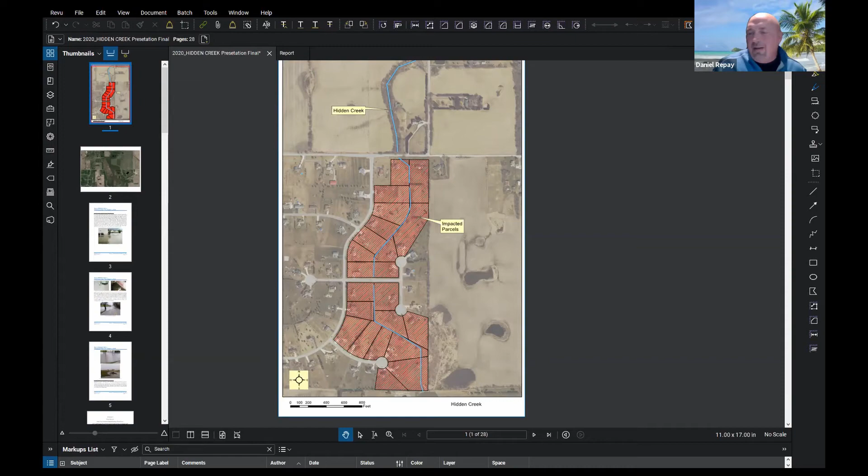All right, next up on the agenda appears to be the city of Crown Point. Will you introduce that? Sure. I don't know if Al or Andrew is going to lead the presentation for this interceptor. I think it's just for the CSO. They had sent us some information this morning for a part of the presentation. I sent it on to you guys. I believe that's what they're going to use here today to show you the amount of CSO going into Main Beaver Dam Ditch. That's about the best I could lead into this presentation.

All right, thanks, Dan. My name's Al Stong. I'm with Commonwealth Engineers, and we do most of the utility work for the city of Crown Point. My partner, Andrew Robarge and Teresa Hartwig are on the line as well. And Terry Sikora and Jason Scott with the utilities are here. I have a short presentation. It's 14 slides that I'd like to share with you now, if that's okay. Absolutely. Okay. Can you see the cover presentation? I can. Yes. Great.

The first slide is a video clip that was shared with me from one of the homeowners' complaints last year in May of 2020. So I'll play this. It gets brighter as it goes on. But this clip is identifying a significant flooding issue. You know, sir, we've seen a lot of these videos and they're all very disturbing. Is that a pool? That's a pool. It is. Okay. All right, we get the idea.

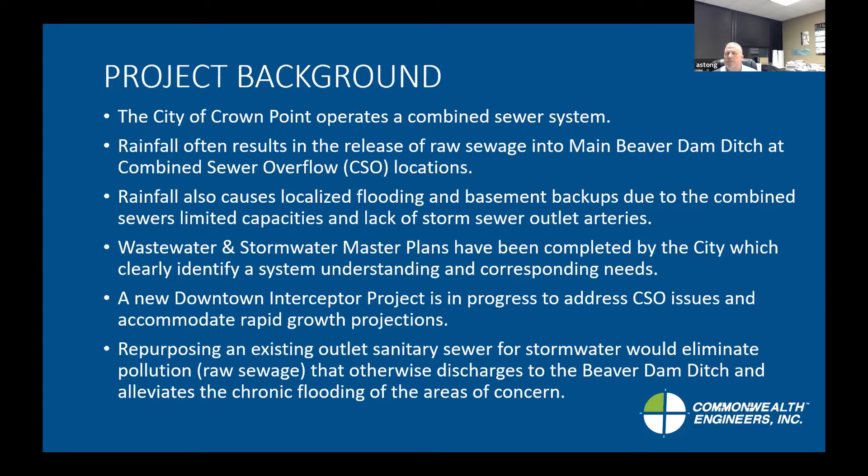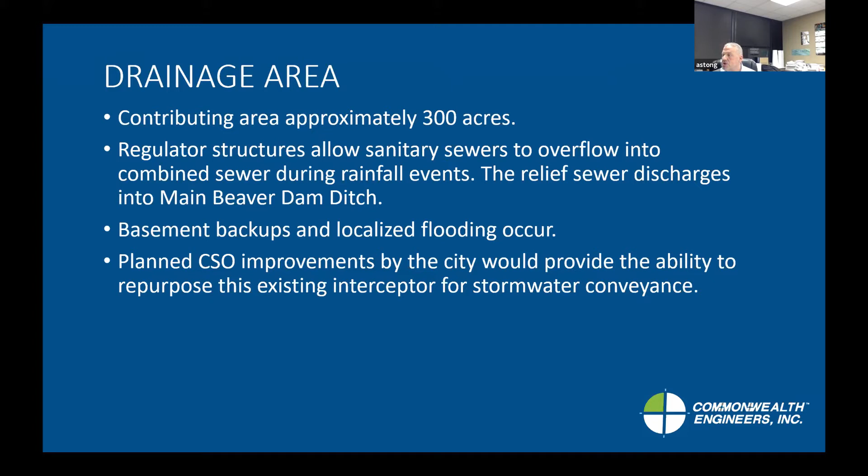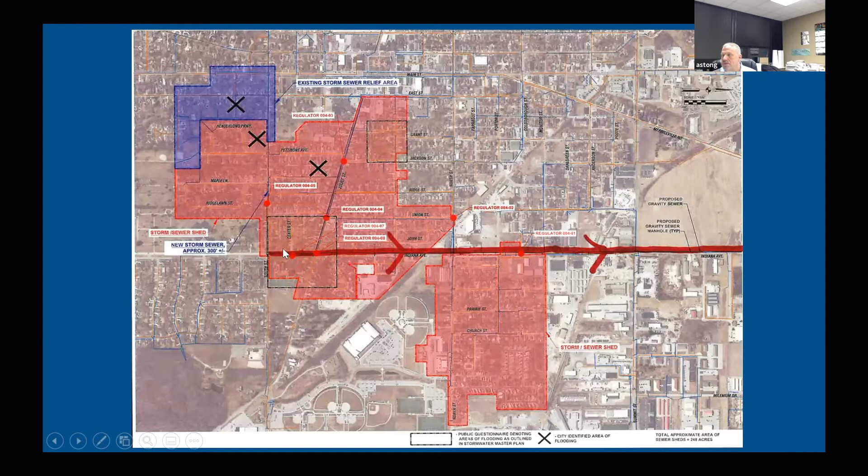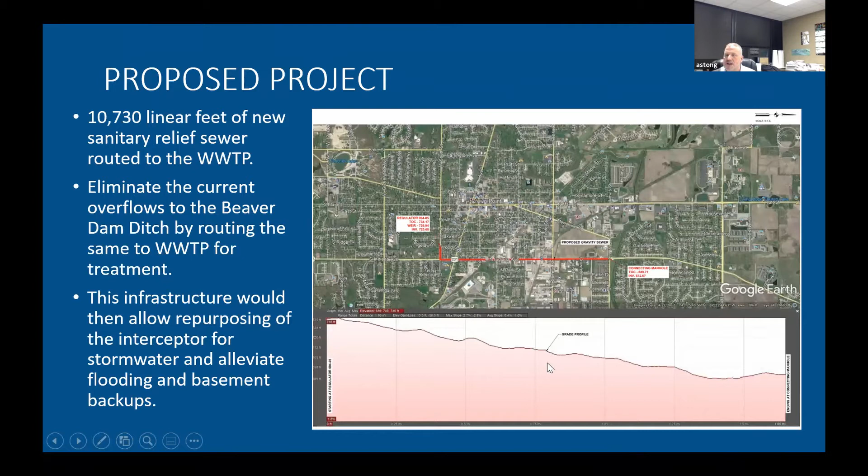So moving on, the area in question is about 300 acres. We have currently what's considered a combined sewer, to where when the sanitary sewers exceed their flow, they overflow into this combined sewer and then flow to the Beaver Dam ditch for discharge. This is the area in question, and this is the interceptor in question. That's the combined sewer. It's approximately 11,000 lineal feet, varying in diameter. And the setup is similar to this. Here's your existing sanitary sewers. It overflows when it rains into this combined sewer, and this combined sewer goes down to the Beaver Dam ditch and discharges.

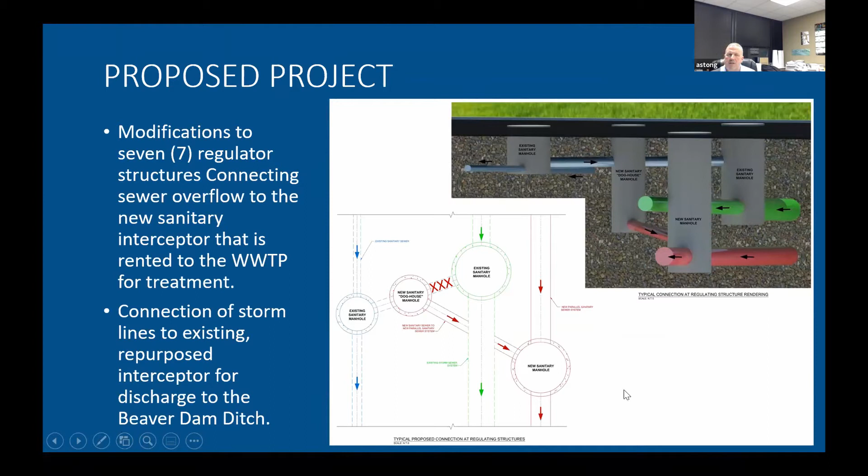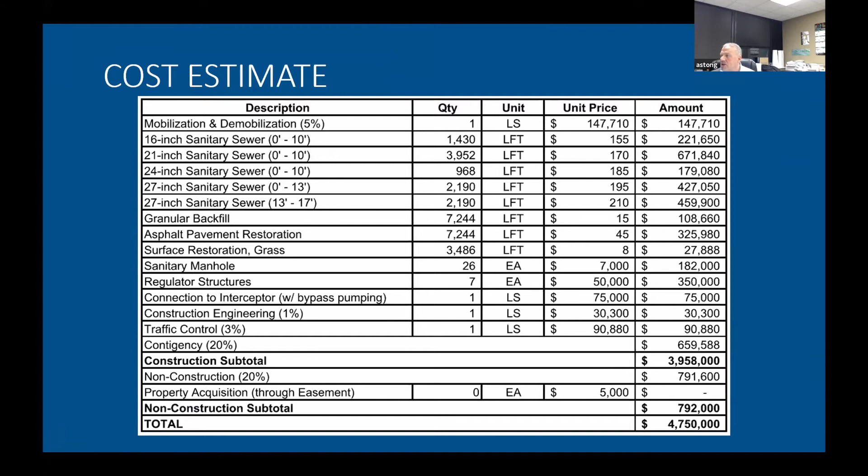What we're requesting consideration for funding for today is the planning associated with a relief interceptor. We want to install a more shallow relief interceptor that we can utilize in lieu of the existing combined sewer, that we can overflow into and discharge into a manhole that then will take this flow to our wastewater treatment plant. That will open up this sewer so it can be used solely for stormwater purposes, and we can pipe adjoining neighborhoods' stormwater systems to this interceptor.

You can't connect stormwater to a combined sewer. But by making it a dedicated storm sewer, we could then pipe other smaller lines that can't escape the watershed to this larger interceptor, take it down to Beaver Dam Ditch through a swirl concentrator and discharge. So that takes the sewage overflow during wet weather events off the ditch. And it also provides us a relief for our stormwater flow in the area.

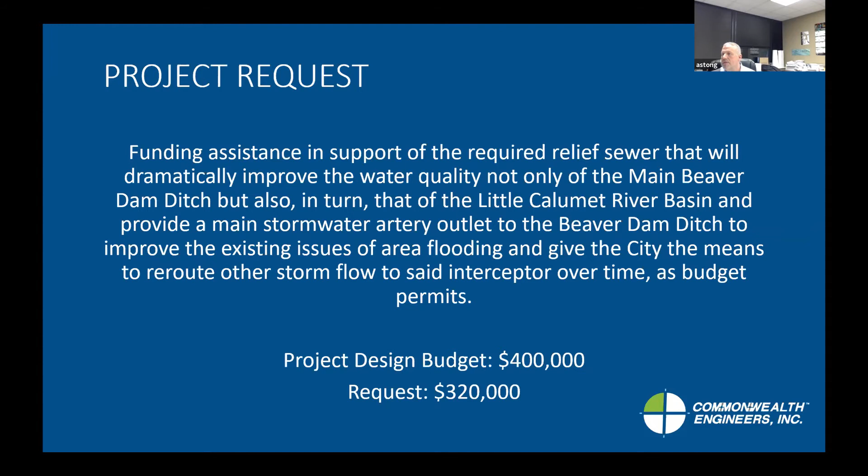We ran a hydraulic simulation over 5 years. Right now, as a CSO community, when you get above the 10-year 1-hour storm event, you can discharge into the ditch. So this is the total volume over a 5-year simulation of historical storm events, about 50 million gallons. So this project would alleviate, historically, 10 million gallons a year of combined sewer that currently discharges into the Beaver Dam ditch. And we would take it instead to our treatment plant.

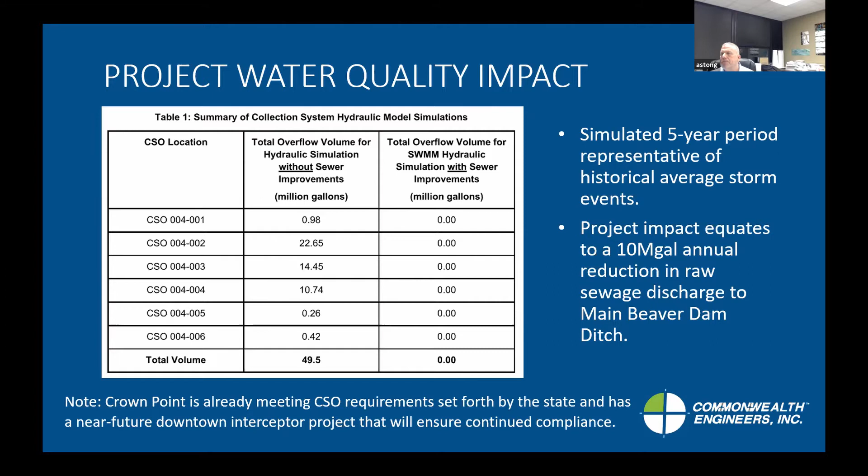The beneficially impacted structures, we have 610 homes, 145 mobile homes. The main purpose is to get a large interceptor outlet to the Beaver Dam ditch for stormwater. Most of our stormwater systems can carry up to the 2-year 1-hour storm, and we just don't have large enough pipe to get the storm out of Crown Point and to our drainage ditches.

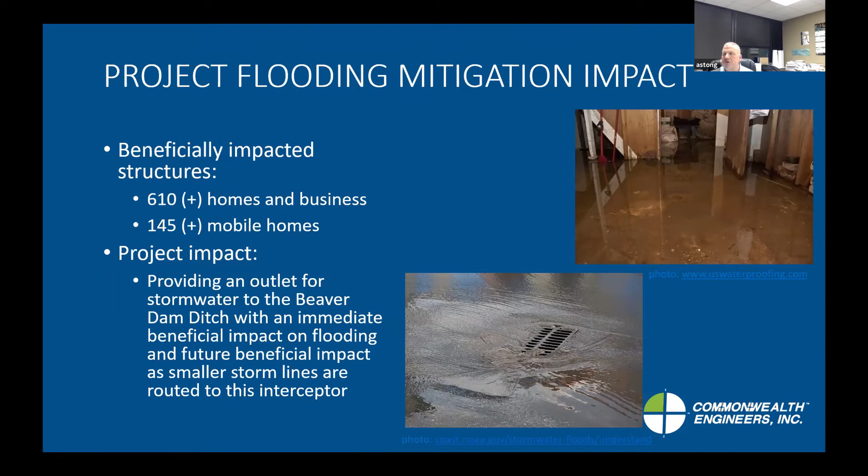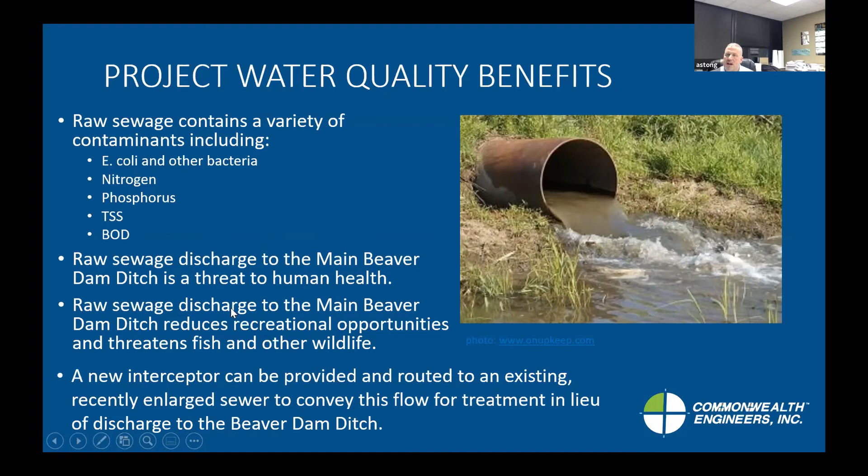So you've heard these requests before. Obviously, there's a lot of benefit to alleviating the combined sewage off of the Beaver Dam ditch from a human health standpoint. And the Beaver Dam ditch flows and impacts Hobart, New Chicago, and Lake Station. So by taking those flows off of the Beaver Dam ditch, we would anticipate some water quality benefits downstream as well.

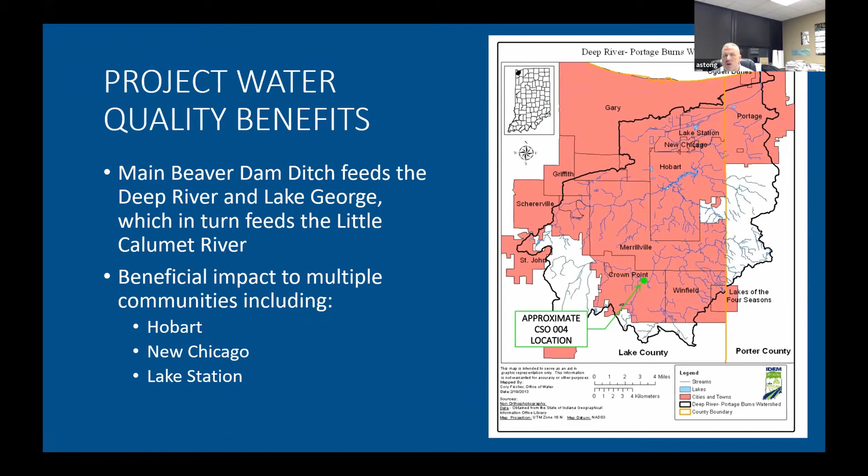That's what I had to share tonight as far as our request. Again, it's for funding consideration for the design of a parallel interceptor that we can dedicate for CSO overflow and then repurpose this existing interceptor as a stormwater interceptor. Are there any questions? All right, back to the board. You guys have any questions for this fine presentation?

I'll have one. Mr. Trunk, help me between an interceptor and a combined sewer. I mean, is this bypassing it? Because even though Crown Point is older, there's combined sewers everywhere that if we fix those, there's a huge benefit and everybody could sign on to that. Once we do one, we're going to do about 1 million of them. So how would you offset that thought process with this particular application?

The way I would offset it is saying that this is not a combined sewer project associated with the community's long-term control plan. We've already met compliance. We're overflowing into this interceptor in compliance with the requirements associated with Indiana Department of Environmental Management. We have an opportunity to where we can reroute this flow to the treatment plant. So that the city's not required to reroute the flow, and they can't reroute the flow unless they put in a shallower interceptor. And if we were to install this shallower interceptor, all of the overflow would be taken to the plant.